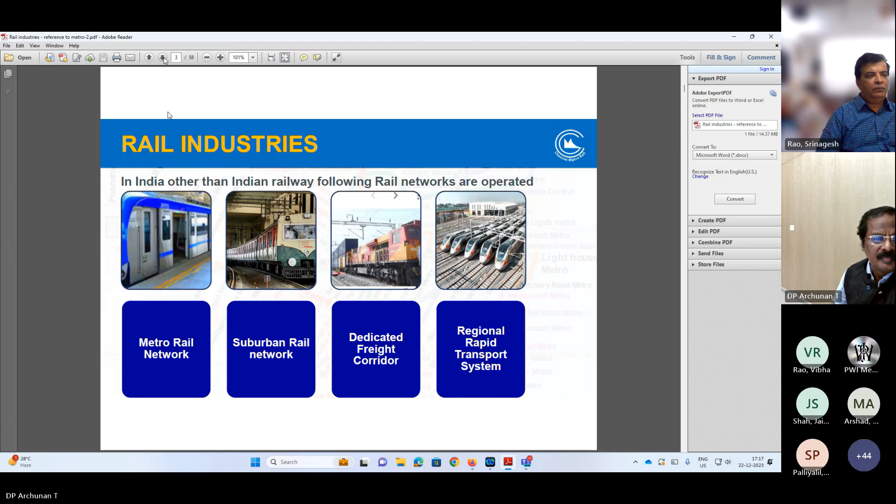The metro rail system is under the Ministry of Urban Development, and we use only standard gauge. Initially, Delhi and Calcutta Metro started in the 80s, around 1987. Subsequently, Delhi Metro used broad gauge, but now we have made standard gauge the gauge for metro.

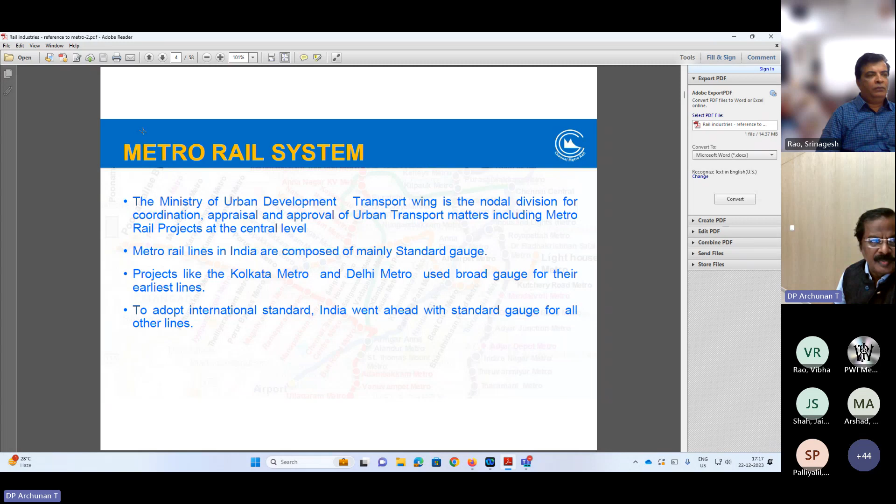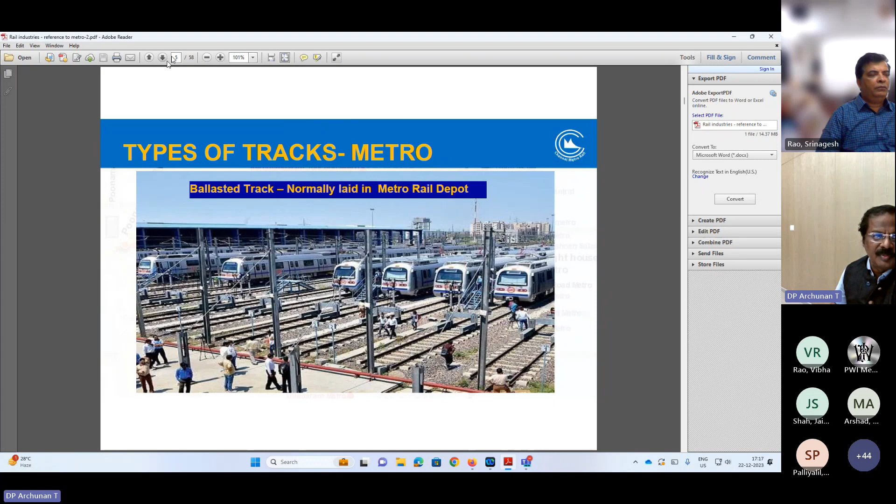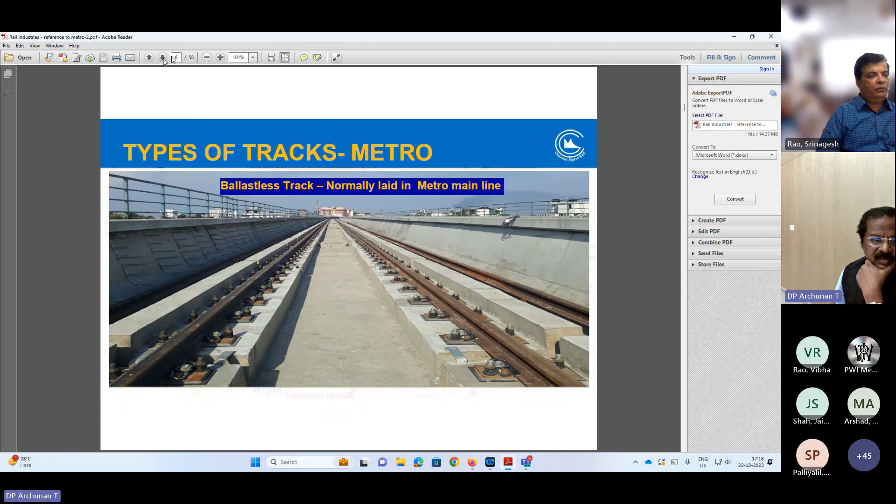We have ballasted track and also ballastless depots in metros. Chennai Metro is the only metro in India which has a ballastless depot. The photo is not available, but we have ballastless depot in phase 1, and in phase 2 also we are developing ballastless depot. This is about the ballastless track normally adopted in all metros in case of elevated track.

Our track structures are governed by RDSO. Even though we are under the Ministry of Housing and Urban Affairs, we still depend upon RDSO for technical specification, because the Ministry of Housing and Urban Affairs does not have a technical body. So we depend upon the Railway Board for technical approvals. The balance, everything including execution, is done by respective metros.

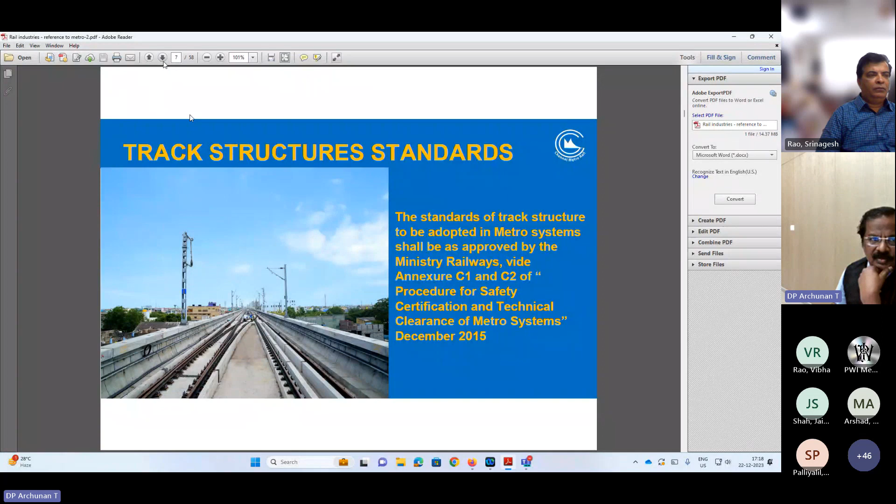This is the UIC 60 profile we use. We use head-hardened rail. In railways also they use the same profile, but we use fully head-hardened rail because of sharp curves. In metro environment, the alignment has a sharpest radius of 120 meters, and 40% of the length is between 120 meter radius to 300 meter radius. Such a sharp radius is not allowed in broad gauge, but in metro we have no other way because of built-up area, we are doing viaducts. So we necessarily have to use head-hardened rail, otherwise the head will be worn out.

So at present, until a few years back, we were importing this rail. Recently, Jindal has been able to supply, and Chennai Metro and other metros have started using Indian head-hardened rail. Otherwise, we used to import from France and Austria. Even Indian Railway used to import, because head-hardened rails were not available in India.

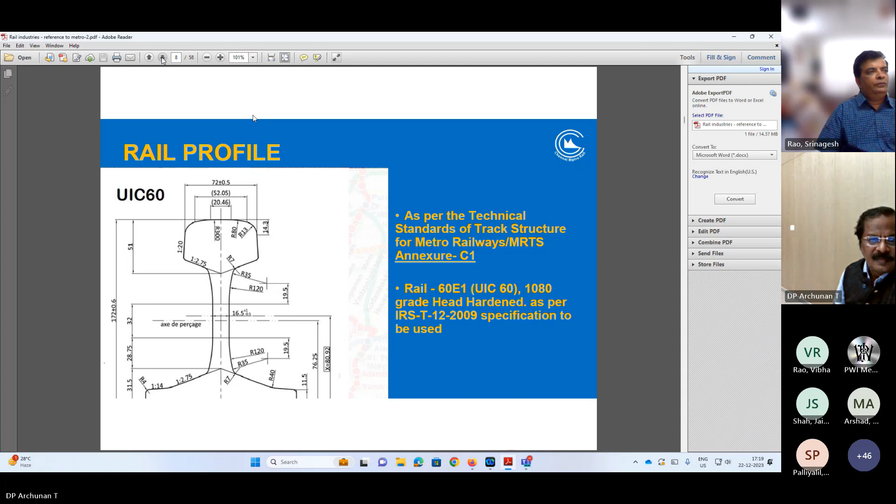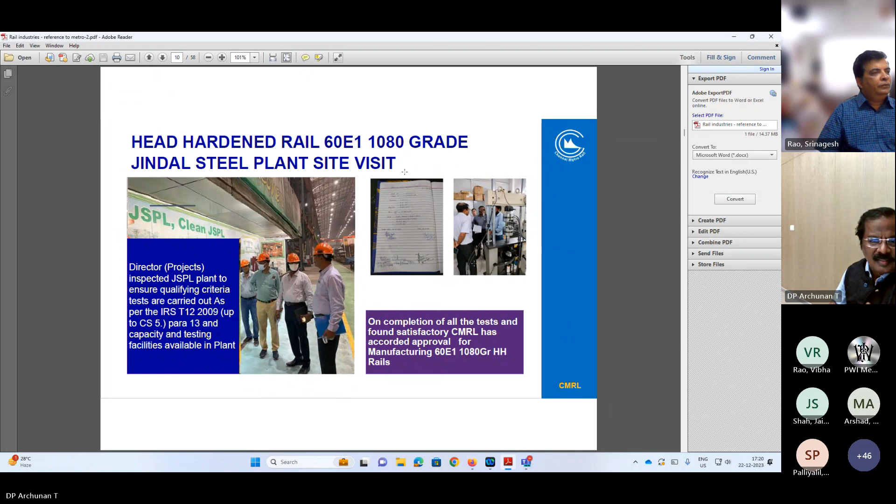These are the codal provisions. Just for information, we have IRS T12 2009. We follow this code only for procurement of railway head-hardened rails. Recently we inspected this factory, the Jindal Steel plant, for procurement of these rails.

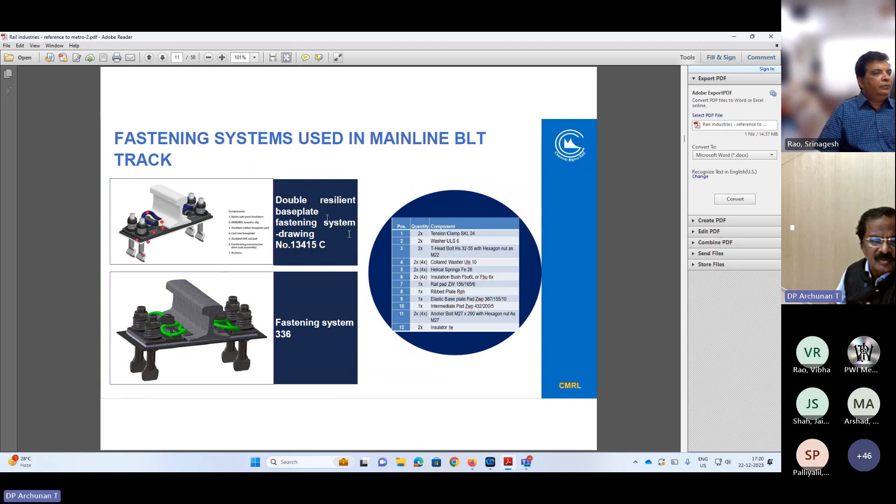We use this double resilient base plate with E-clips. Even Indian Railway uses this same standard.

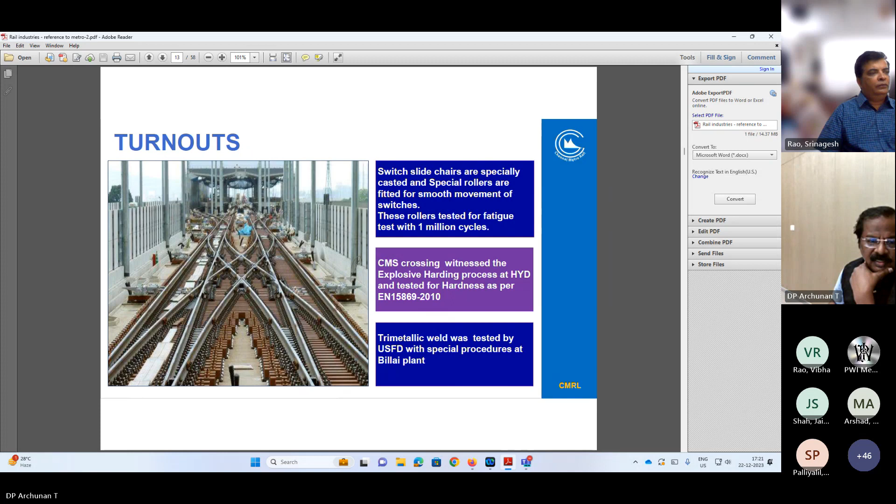You can see these turnouts. The only difference in metro turnouts compared to Indian Railways is we make custom-made turnouts based on the site condition. We take the measurement, we order accordingly, and the entire thing is welded. Here they show welding, but we don't have any fish plated joint - the whole thing is custom made. This is the welding technology.

The other difficulties are working in tunnels compared to elevated sections. Track work in tunnels is very difficult because every welding machine has to go through a very small opening through the underground station. From there, we have to drag the rail inside the tunnel, unload the welding machine, and do welding inside. You can assume how difficult it is to weld inside the tunnel - the working conditions are very tough. There will be a lack of oxygen, humidity will be there, and a lot of sweating will happen. We have to ensure fresh air and all the facilities so that labor can work.

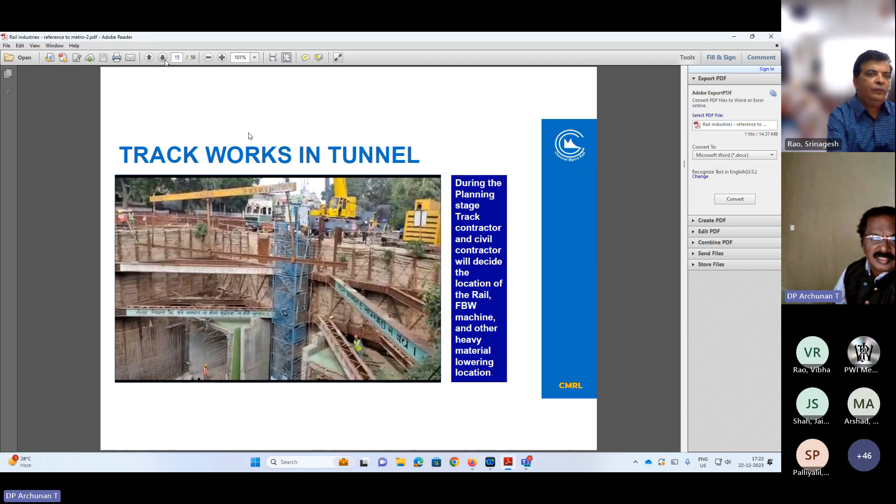And we cannot make long welded rails outside because we cannot lower them into the space. You can see the track work inside the tunnel.

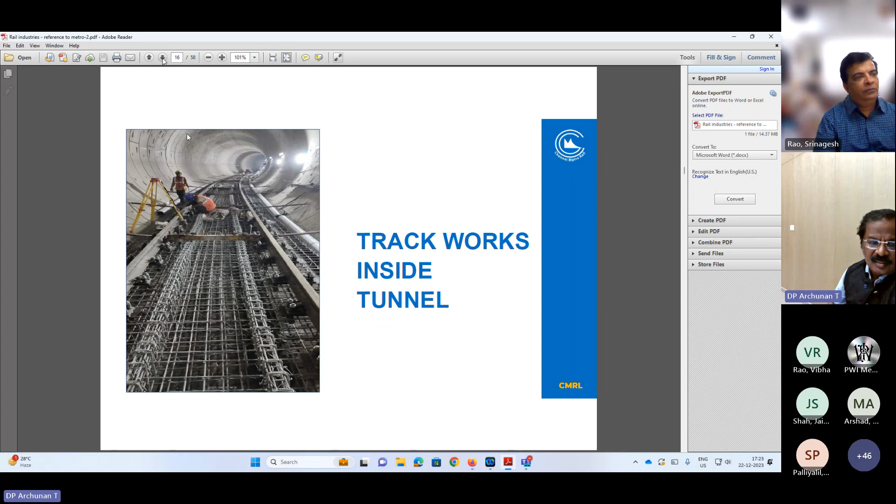One more difficulty is every 3 to 4 kilometers there is a station, and only there we leave an opening for the rail. So workers have to drag the rail inside the tunnel nearly 1.5 kilometers on either side. This is unavoidable because if we leave openings everywhere, we cannot complete the station. These are the difficulties in executing track work inside the tunnel.

The concrete has to be pumped for long lengths. The concrete develops segregation, and pumps do not work well - this is another difficulty. Pumping has to be done from the top. You think about sending the concrete inside, how much the pumping pressure should be, and all these factors.

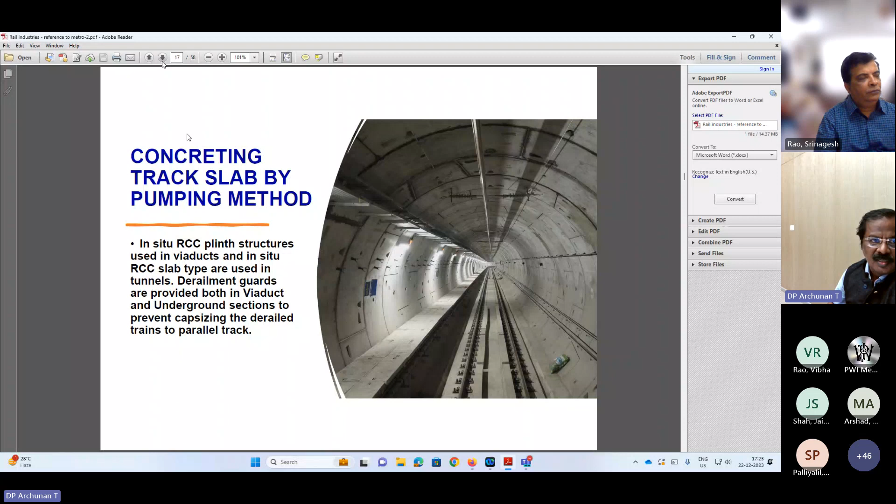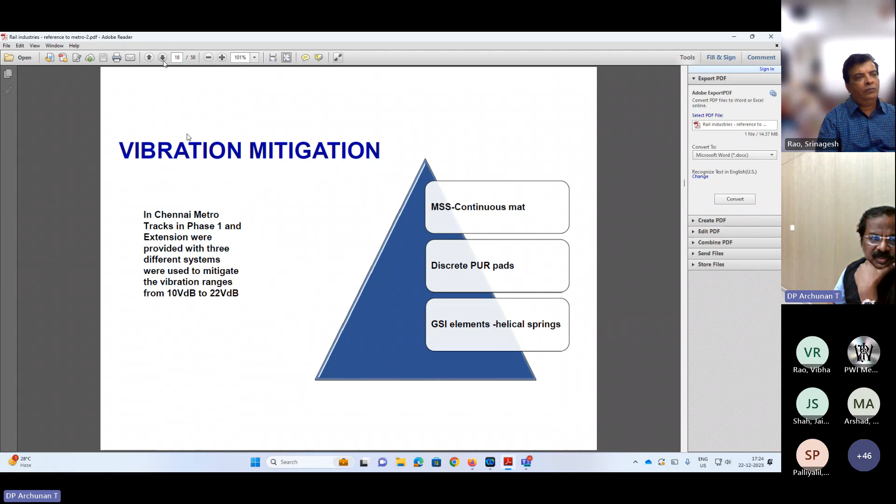We use all kinds of vibration mitigation measures wherever commercial establishments and hospitals are there. Hospitals have sensitive instruments, and as per codal provisions, we have to reduce the vibration. Otherwise those instruments will get affected and the measurements won't be accurate, causing a health hazard. So we use a lot of vibration mitigation track.

Again, like Indian Railway, we do rail grinding - recently we have also done rail grinding. Because of the sharp curves, rails develop corrugations, so we have to frequently, once a year or every 1.5 years, do rail grinding to smoothen the surface.

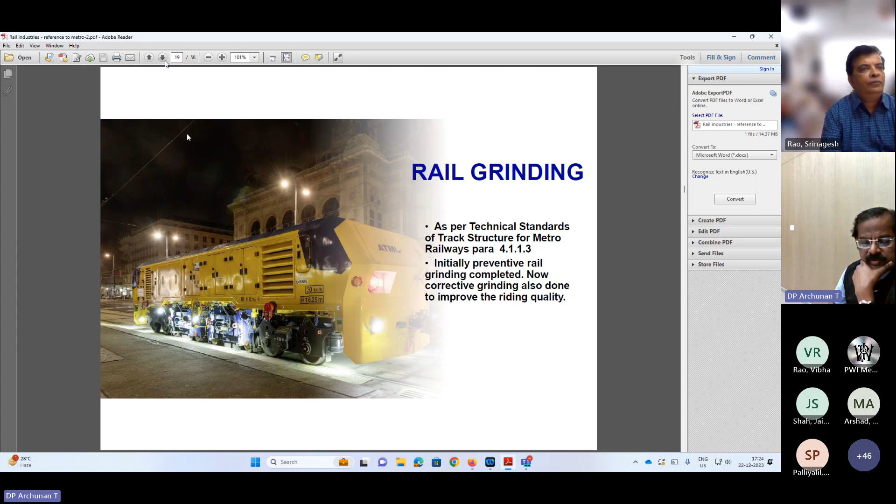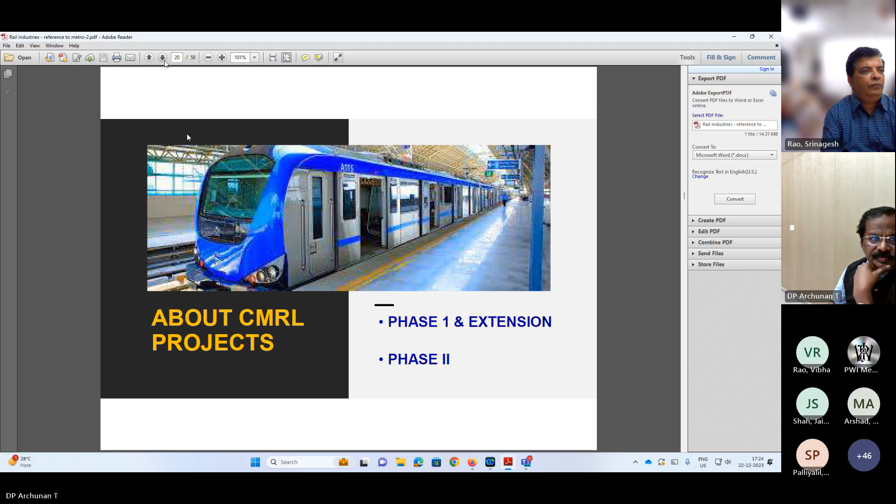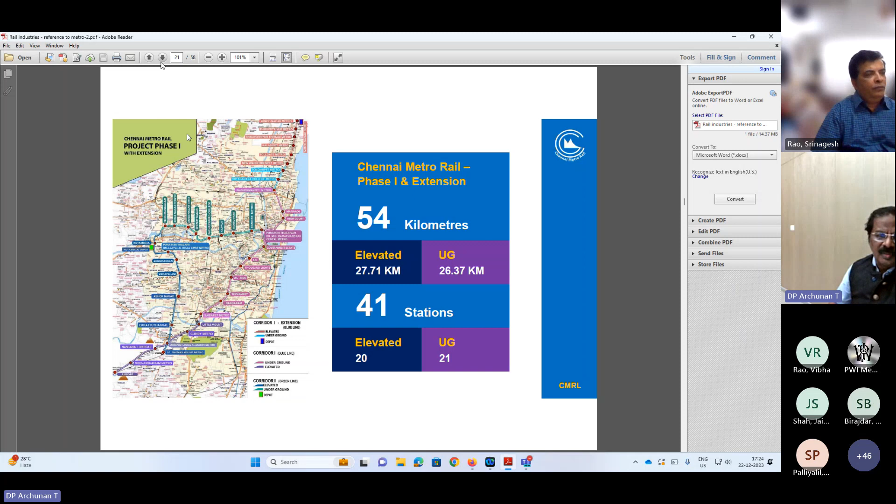This is about the track I just told you about. This is about the phase 1 project, which has been completed and is under operation, and again it is about phase 2. In phase 1 we have 54 kilometers of track, out of which 27 kilometers are elevated and about 26 kilometers underground, with 41 stations.

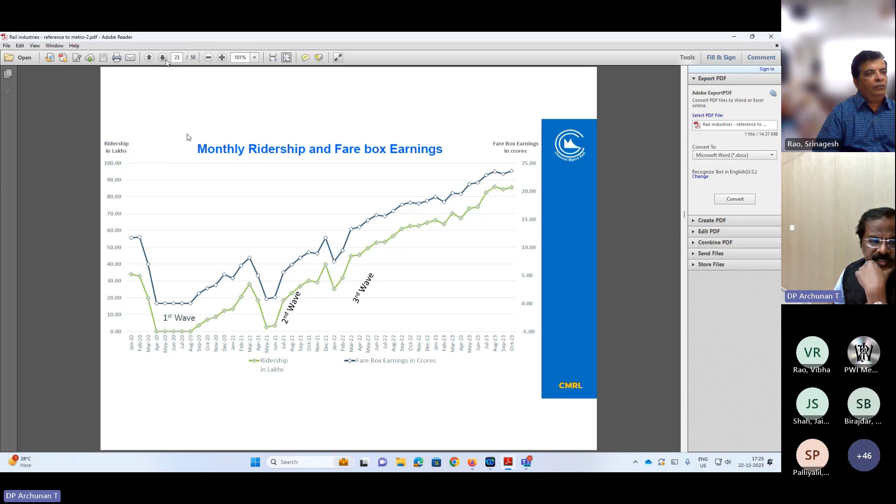Our ridership was very low a few years back. Now we have gone up to 3 lakh. You can see 3 lakh per day, roughly. Each month about 85 lakh. This is the August figure. In August one year back it was only 56 lakh. In February it became 63 lakh. So daily ridership sometimes crosses 3 lakh, but the average is about 3 lakh. Saturday and Sunday it will be less.

This is the prestigious phase 2 work. You can see the green and blue; this is phase 1. The other 3 corridors we call the purple corridor, orange corridor, and red corridor. With these 3 corridors put together, we are constructing about 116 kilometers and 118 stations. You can see the portion of elevated and underground. And we are using nearly 23 tunnel boring machines in phase 2.

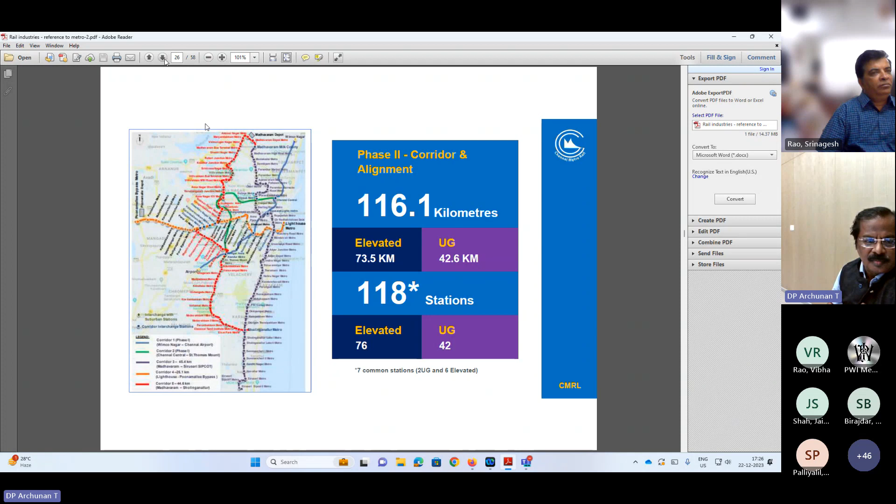This is one of the largest. In India, nobody used 23. Somewhere, they say, Russian people used 23. That is why I call this the largest project taken up at a time. The cost of the project is 63,000 crore.

These are the funding agencies. The major funding agency is JICA, the Japan International Cooperation Agency. Then AIIB based at Beijing, and ADB, NDB; they are the multilateral agencies. JICA is a bilateral agency. The balance is from the Government of India and the Government of Tamil Nadu.

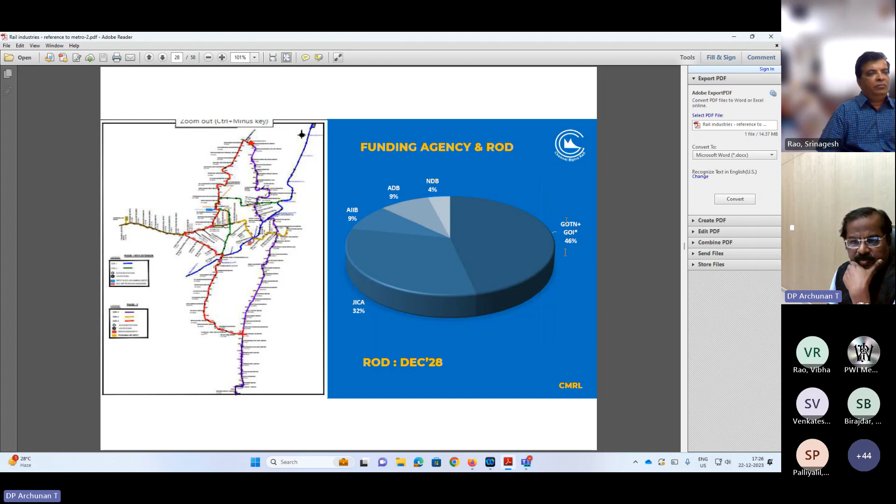The main challenge of metro construction, first, is land acquisition. Without land acquisition, we cannot do utilities and traffic management. Inside the city, particularly in Chennai, we have only 16 to 17 meter roads, and in many places 10 meter roads also. To construct a pillar, we need 8 to 9 meters for the pile and pile cap. If you take away 8 to 9 meters, there will not be any space for road traffic. So first we have to acquire the land to divert the traffic.

Second, once we divert the traffic, we have to find the utilities. Then only can we start the work. And there are different utilities, so very many stakeholders are involved. So these 4 items are the most challenging ones. When we go through, we can see the challenges.

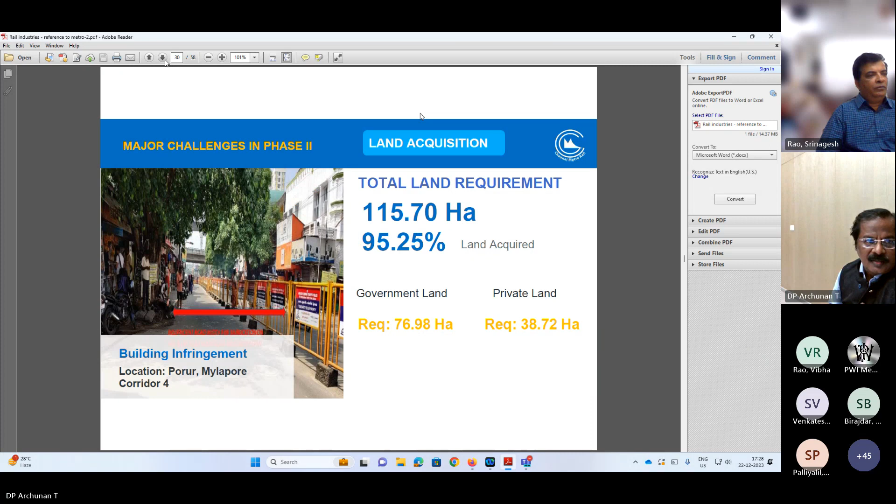We have already acquired about 95% of the land. You can see the road; it is a small road, and the existing road is only 10.5 meters. We widened it to 24 meters. We demolished these buildings in this old photo, and there were a lot of court cases. Many issues are there in land acquisition; it took more than 1.5 years to acquire this land. Unfortunately, at this particular location we acquired the land after awarding the contract, so the project got delayed.

And utilities. Since we adopt OHE, overhead traction, these kinds of utilities are crossing in many places; there are more than 12 such crossings. We have spent more than 500 crore to lower these overhead high-tension lines, otherwise they will interfere with our overhead traction. Getting approval and making it underground is a major challenge. Then only can we do the piling; otherwise, during the piling itself, induction will come. We are able to overcome everything except one place. Still one place we are not able to do.

These are the utilities. I am projecting only one of the stations, Purasaiwakkam. You can see the utilities are exactly below the diaphragm wall. This is an underground station. The blue dotted line is the diaphragm wall. When we excavated for the diaphragm wall, we found this many utilities. Think about diverting them. Diverting these utilities requires a separate land location. Unfortunately, we don't have land there because it is a built-up area. We need a few meters, and if we acquire that on a large scale, multi-story buildings get affected.

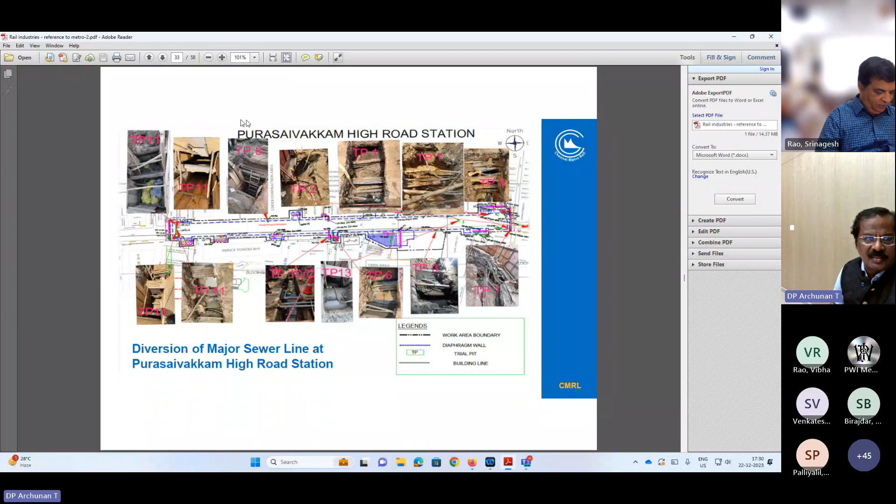So what we have done over the last 1.5 years is shift them within the station itself. The station width is about 30 meters. Within the station, we shifted to one side, then did the diaphragm wall, then shifted again. We have done 2 rounds of shifting. About 90% of the work was completed in the last 2 years without land acquisition, because with land acquisition huge buildings would have to be demolished. Partial demolition is very difficult and we would have to acquire the full building, so we adopted this method. There are many locations like that, traffic junctions and all, posing a lot of problems for utility shifting.

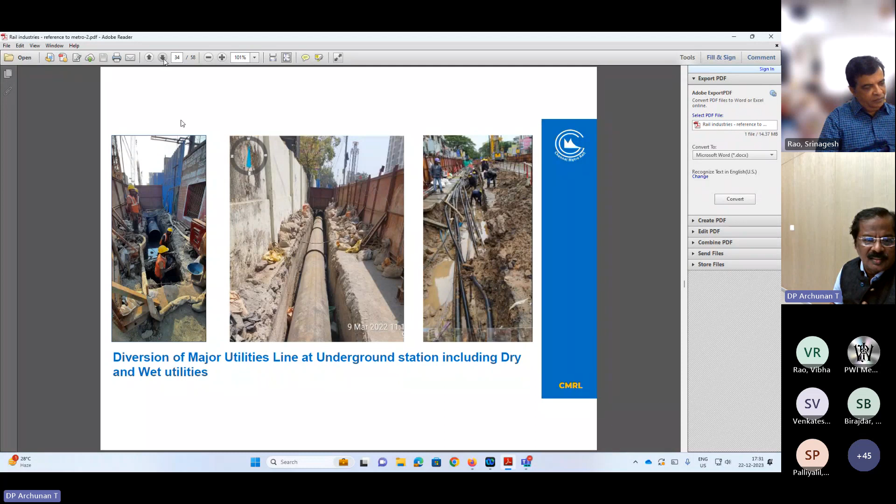You see, we will shift to one side and we will shift again to another side. Then the stakeholder meeting. There are some 20 stakeholders. It is very difficult to get approval from the stakeholders for any utility because it is not their baby. We have to do the project.

And at the chief secretary level, we have a high power meeting every 2 months. That is mandatory for land and other issues. So that way the state government is helping us to overcome the difficulties to execute the project in the urban environment.

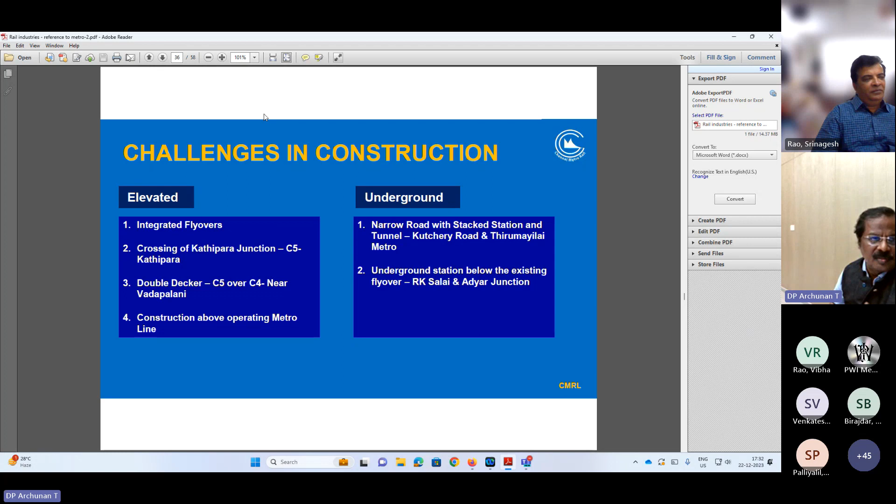Next is the challenges in the construction part. I cited here only a few challenges, some 4 in elevated and underground, but the design and construction of phase 2 is very challenging. Everything will take time. I will highlight a few locations. You can see elevated 4 numbers, underground 2 numbers. This is the first challenge in elevated.

On corridor 3, we are linking with the existing highway people. They want to construct a flyover. When they construct a flyover and we also construct, it will take time, and they would have to start late, and it will be a problem for traffic, passengers, commuters. So they have to start the flyover later and we want to start early.

Then after repeated meetings, we have clubbed both. Now we are executing a 4-lane flyover in a single column, 2 lanes on each side. Then the metro, we are running on the top. Nearly 4 locations we are doing like this.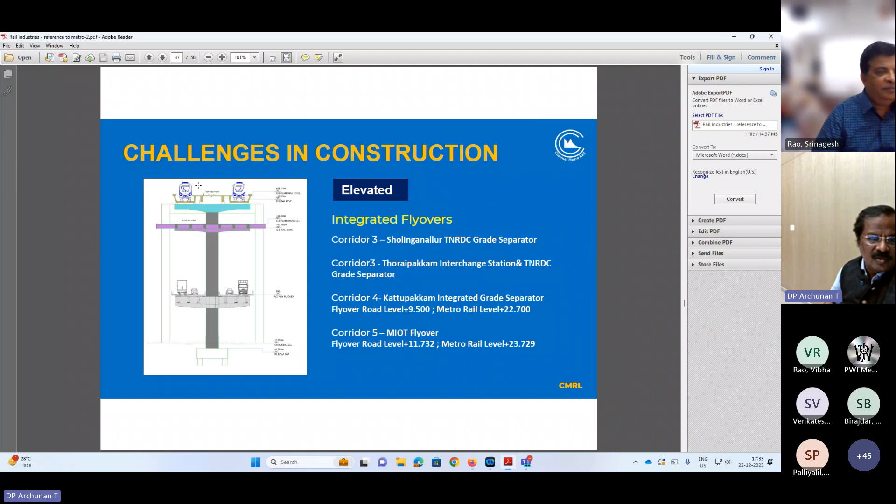Work is under construction. So again, this is most challenging in terms of construction methodology, without disturbing the traffic below, both road and our own corridors, we are executing this work. So this is again a construction challenge, and we have to ensure the safety of the commuters and passengers below our corridor.

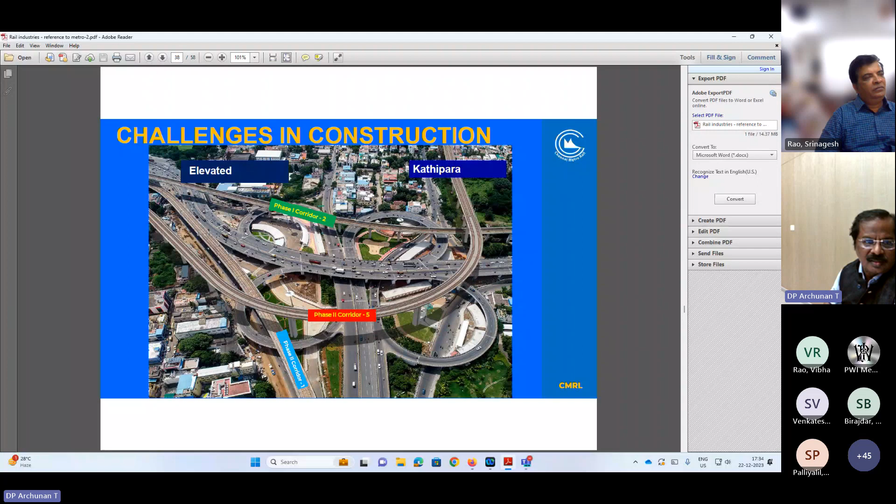And this balanced cantilever is on a 120-meter radius sharp curve. That is the sharpest curve, and it is about 480 meters long. Nowhere in India have they done this much length. Foreigners may have done it, but in India, 480-meter length with a sharp curve has not been done. So that is a challenge, both design and construction wise.

This is another location in corridor 4. I will show you. This is 2 corridors, one above the other, we are constructing. You see this corridor. This is one single column. This is below ground level. The bottommost is the concourse, then corridor 4, then corridor 5. So 2 corridors and also the concourse, all on a single column.

Nowhere in India have they done this type of design, but because of site conditions, we have taken this way. Otherwise, for 2 corridors we would need separate land acquisition, and huge demolition would come. So to avoid land acquisition and building demolition, we have taken one corridor over another and overcome the problem. But it is a big challenge, as all are precast.

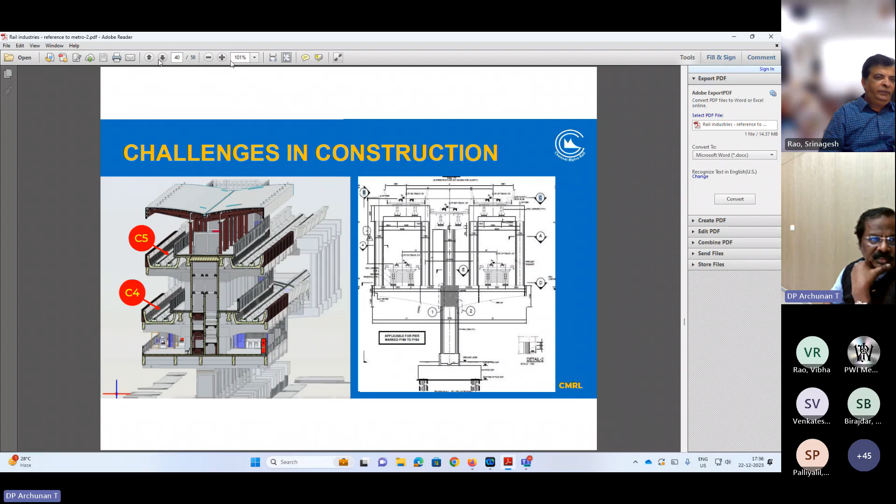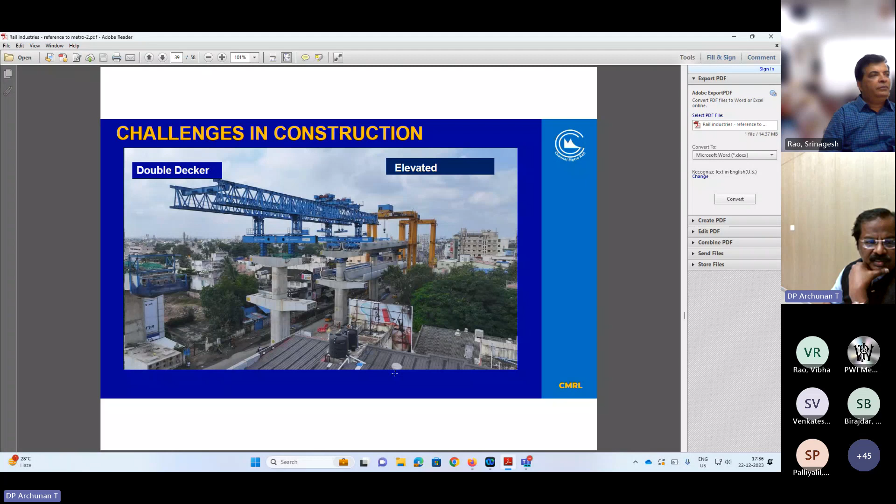Now you can see this one. This launching girder was fabricated in China. With it, first we are doing the bottommost corridor, then the top corridor. Whenever a station comes, the concourse will also be added to this one pillar. So the single pillar takes 2 corridors plus the concourse.

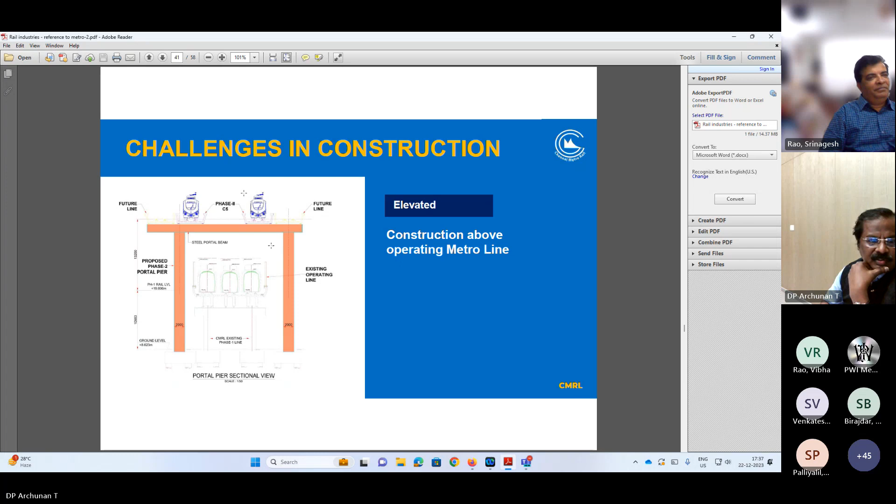This again, you can see inside, small 3 trains are there. One of the locations we have no land because of the existing elevated, so again we are putting that orange color portal, and we are taking the phase 2. Bottom is phase 1. This is near Koyambedu. So encasing the phase 1 through this portal, we are constructing a new corridor. Without affecting the existing running track, we are designing and executing.

Again, in case of one of the underground stations, 2 corridors are crossing. The peculiarity of this station is one side there is a stacked tunnel. This is Thirumayilai station. One side, the 2 corridors are merging here. One is corridor 4 and another is corridor 3. You can forget about the corridor. What happens is we are crossing 2 sets of lines. One side there is no road width, so we are coming as a stacked tunnel, one above the other.

And while approaching this station, we make it parallel. It comes one above the other from one side, that is from lighthouse side, the beach side. Then when coming to this particular station, it becomes parallel. The other corridor comes parallel. While coming to this area, because of land and road width only, we make it stacked.

So there will be 4 tunnels and levels: the top concourse, then 2 tunnels, 1 tunnel at the top, 2 tunnels, then bottom. So it is almost a 5-level station, about 34-meter depth, and also we find rock below 25 to 26 meters. So you think about the difficulties in execution of this station.

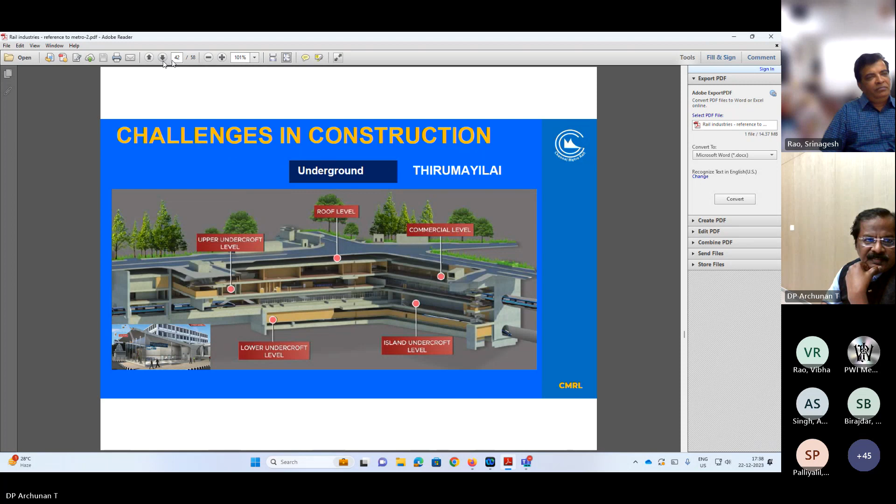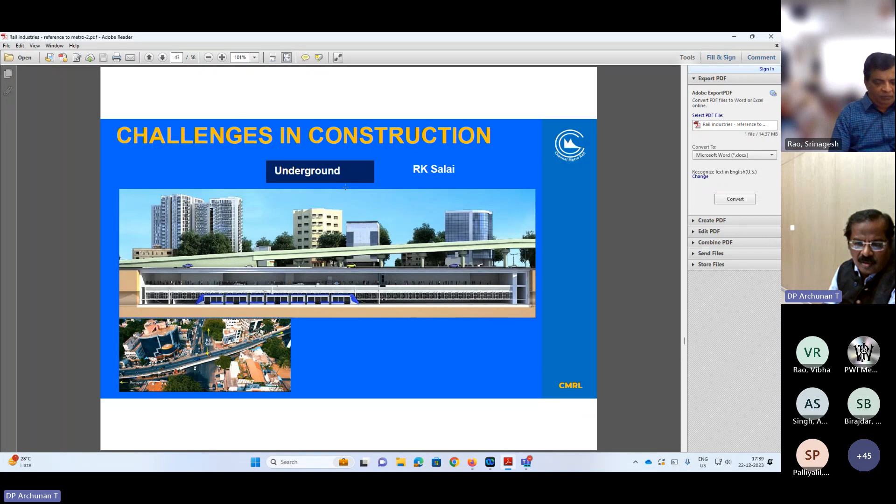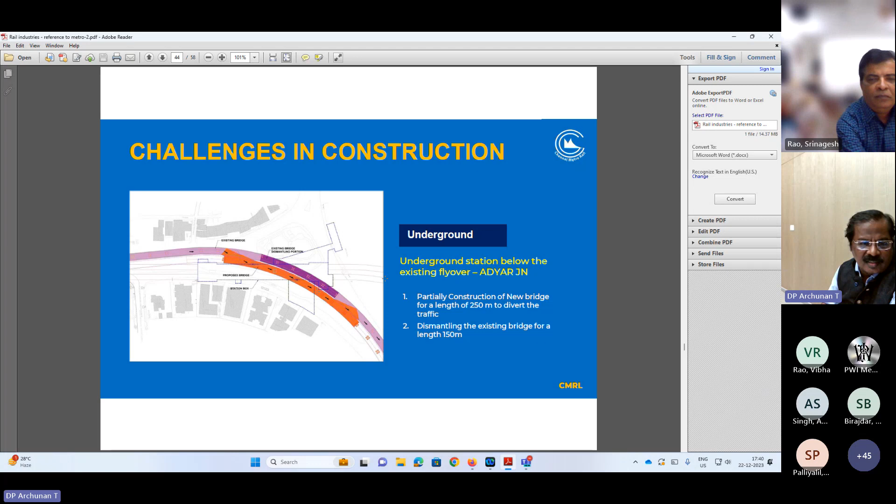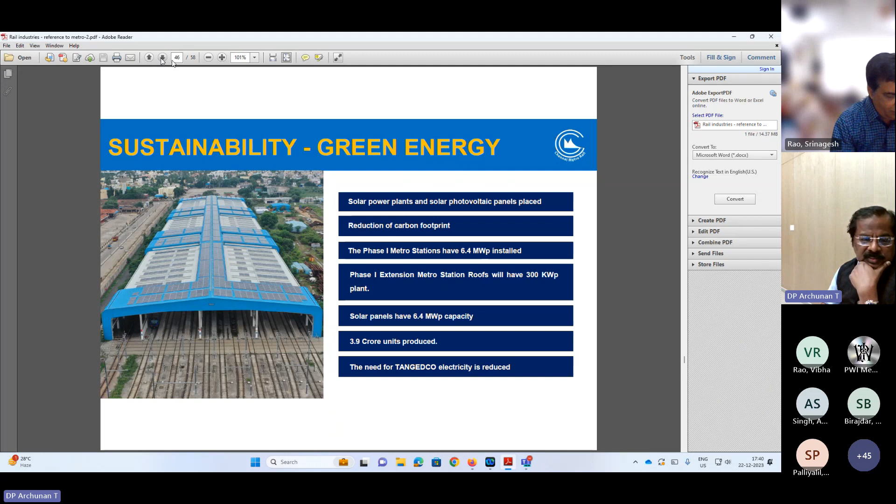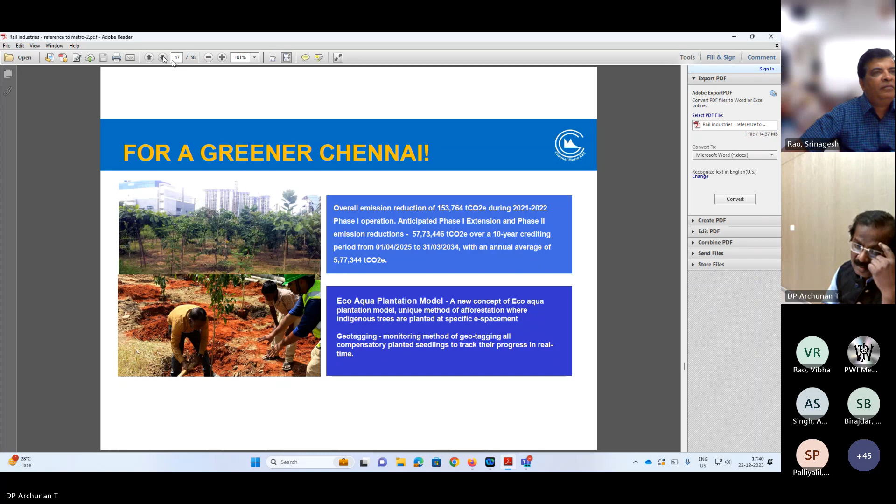Now the project part is over. This is sustainability and the environmental things. We use solar power. Nearly 17 to 18% of our power is generated from solar, and we want to increase it to 35 to 40%. And for every one tree cut, we are planting 12 trees. So already some 30,000 trees we planted. They say each tree reduces carbon dioxide by 21 kg. So this is our green initiative.

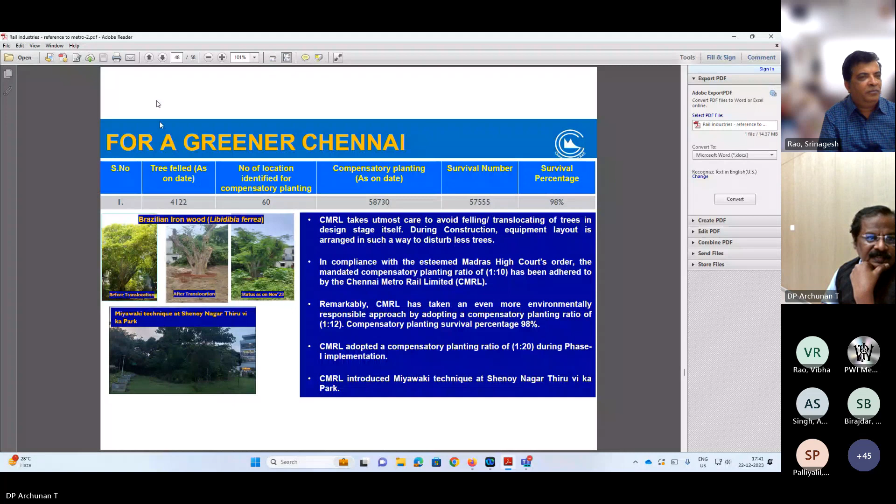Again, on this green aspect, we are using GGBS, ground granulated blast furnace slag. Usage of this reduces cement content. It is an alternative to cement. So when we use this, we are able to reduce the cement to that extent. The carbon dioxide emission also we are reducing.

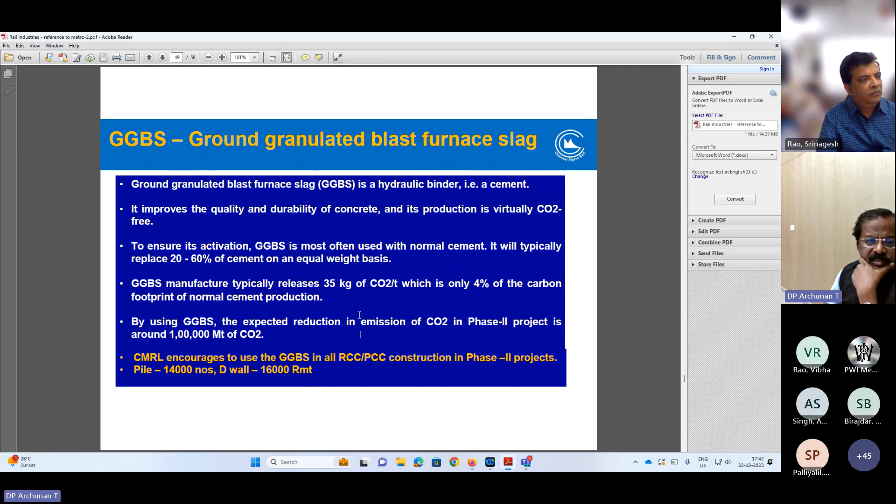This is a major one: except precast elements, all the pile caps, all the huge diaphragm walls. We are doing nearly some 14,000 piles. It is a large project, and 16,000 meters of diaphragm wall, we call D-wall. So in all this we are using GGBS. But in case of PSC precast elements, we are not using GGBS, we are using cement only. So with this, we are able to reduce carbon emission.

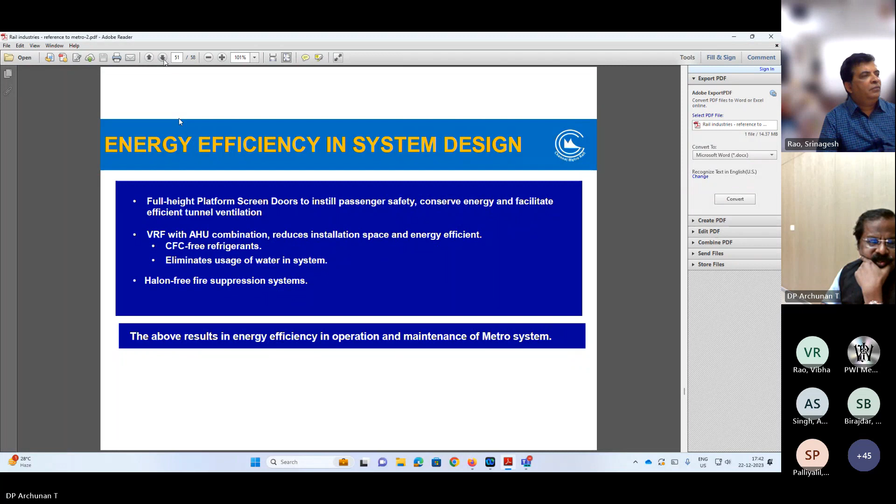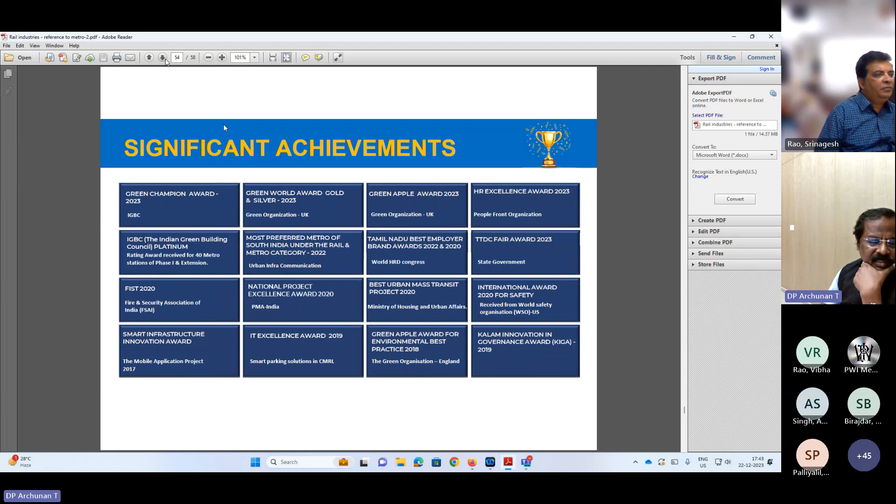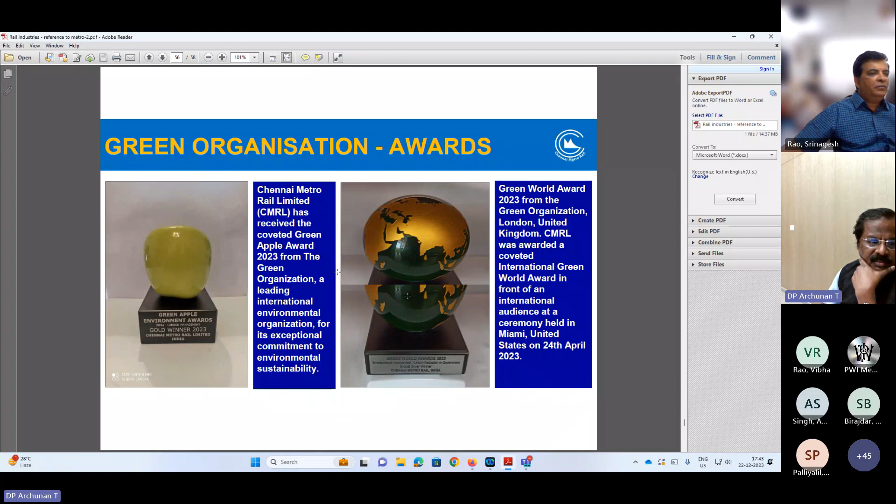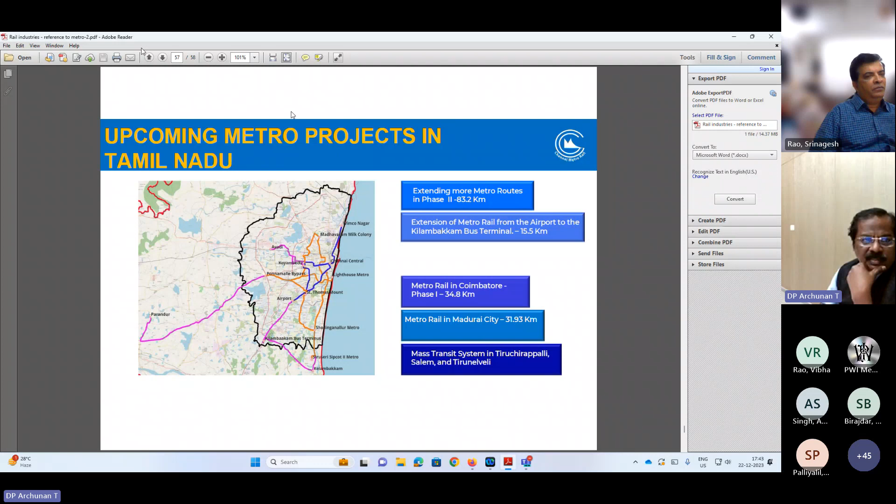And apart from Chennai Metro, we have already submitted a detailed project report for Madurai Metro and Coimbatore Metro. Coimbatore is about 34 kilometers, and Madurai is again about 30 kilometers. Other smaller cities like Tiruchirappalli we also studied, but for Madurai Metro and Coimbatore Metro there is feasibility. And in Chennai also we are going to extend 83 kilometers, apart from this 116 kilometers. These are the upcoming projects.